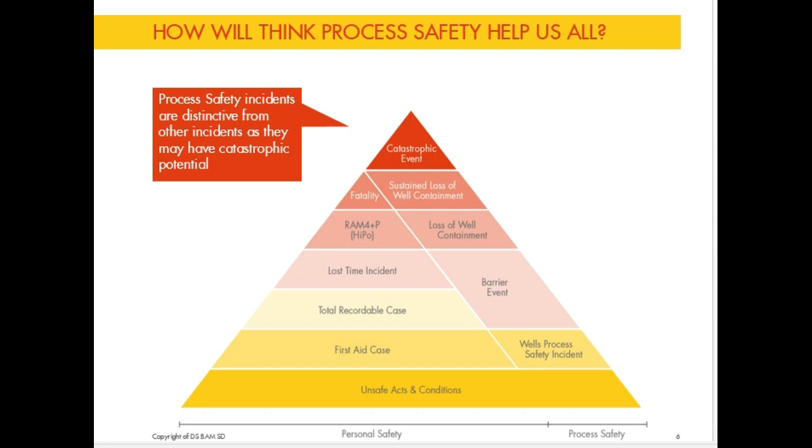We look at process safety from 3 distinct but interlinked perspectives: design integrity, technical integrity, and operating integrity. All of these together are required to ensure that our assets are safe, and we know it, and we can show it. More than 50% of our effort in plant operation, maintenance, and engineering is addressing asset integrity monitoring, restoration, and improvements. To know our plant is safe, we must be honest with ourselves, recognize risk, and address improvements. We aim to understand our barriers to accident events and continually test their effectiveness through inspection, audit, review, incident follow-up, and effective change management.

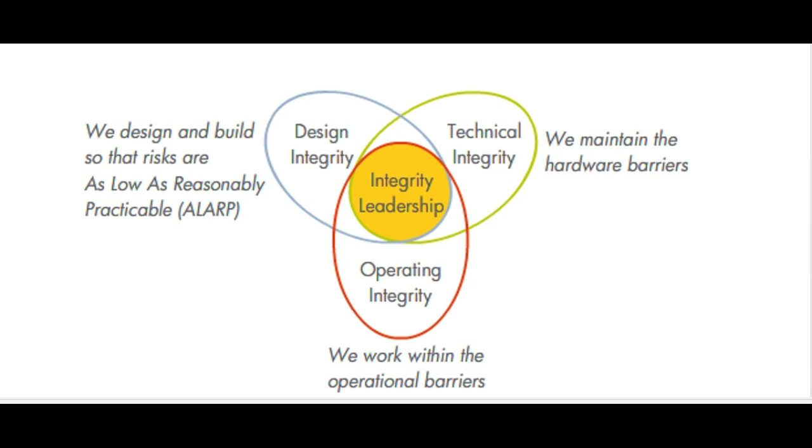Design the well to ensure all basic process safety requirements are taken into consideration. All risks are well defined in the risk analysis when well design is reviewed. It incorporates all basic process requirements. Technical integrity equipment, for example, blowout preventer. Wellhead equipment is technically qualified and good enough to withstand the basic process safety requirements. All risks are well defined in the risk assessment when the well design is reviewed. It incorporates all basic process requirements.

Operating integrity comes during drilling operations, for example, operational process, having protocols and procedures to ensure safe operations. Ensuring operations adhere to the basic process safety, what they need to do to ensure that basic process safety is met. The think process safety elements are developed to improve understanding of wells process safety and enable wells staff and contractors to focus on key process safety checks and actions. Know it, live it.

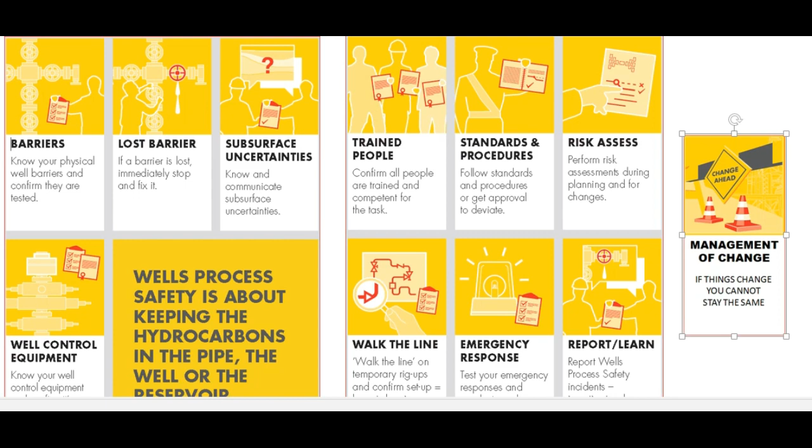Bow tie and barrier ownership. What is a barrier? A risk control or a recovery measure that provides the means of preventing an incident or decreasing the consequences. It can be an equipment or a human intervention, and can also be a control on an escalation factor.

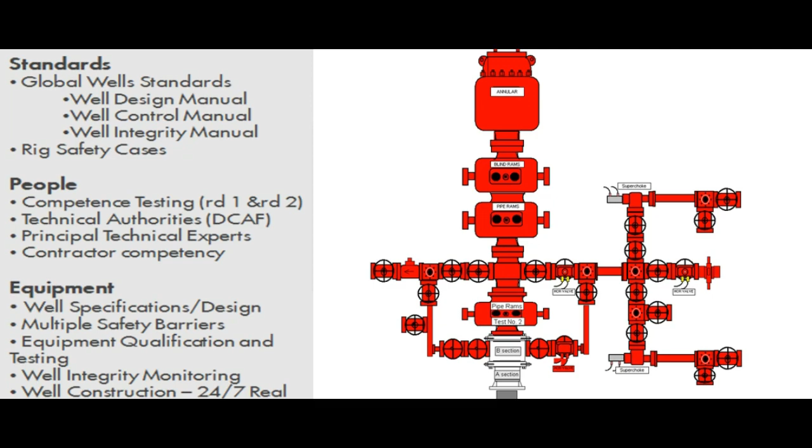What is a bow tie? A hazard analysis tool in which the threats and consequences of a certain hazard are mapped and assessed in order to determine the necessary barriers. Our focus for this video is on the left side, the prevention, minimize likelihood side. The middle circle is the incident that we're trying to avoid, loss of well control.

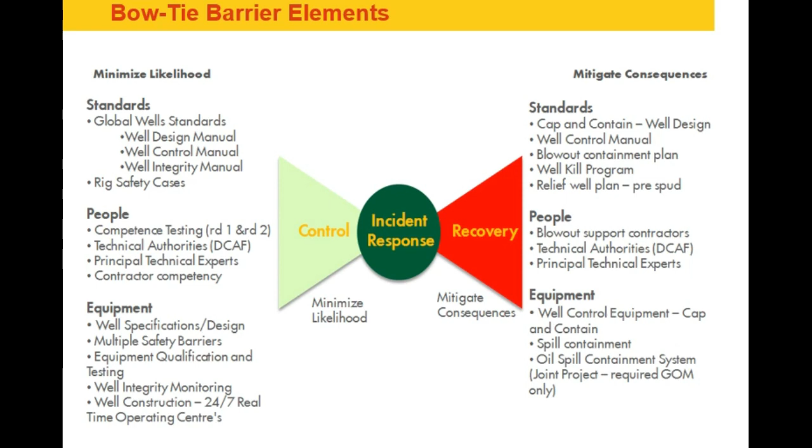Barrier ownership. Know who is responsible for maintaining a well barrier. When an operation changes, always confirm the barriers. Discuss all changes in the status of barriers with your supervisor. Mud logger: never silence an alarm. Calibrate equipment regularly. Verify trip sheet. Investigate. Report discrepancies. Know your alarm parameters and set accordingly. Report cavings.